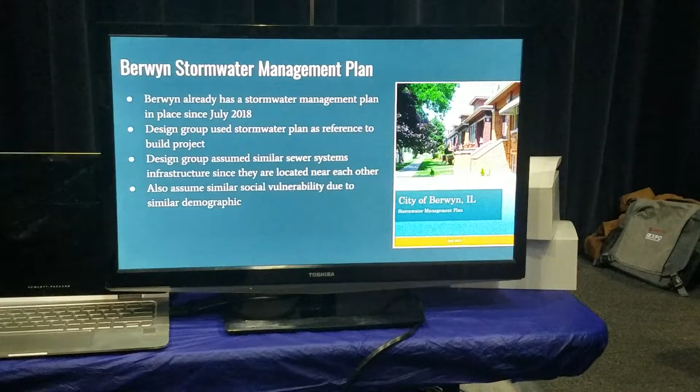From doing research on Berwyn, we found that they do have a stormwater management plan, which we used as a reference to build our project. We also found that they do have sewer data electronically and GIS data. So since the communities are so close to each other in proximity, we decided to assume that the sewer system in Berwyn is similar to that of Cicero's, as well as the social vulnerabilities. Since they both have similar demographics, we assume the same vulnerabilities related to the flooding issues.

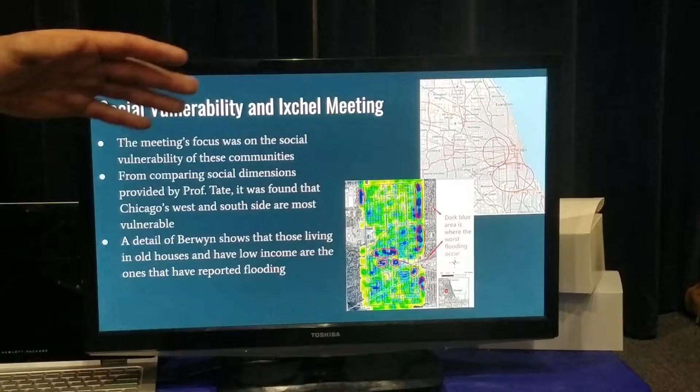An overview of the social vulnerability from Chicagoland. I used the methodology from a professor at the University of Iowa. He teaches a class of social vulnerability and geography, so I went through his lectures and followed his steps to figure out which areas are most socially vulnerable by comparing census data from 2011 to 2015. I compared the poverty rates, the age, how many dependents, homeless, and I found that Chicago's west and south side are most socially vulnerable.

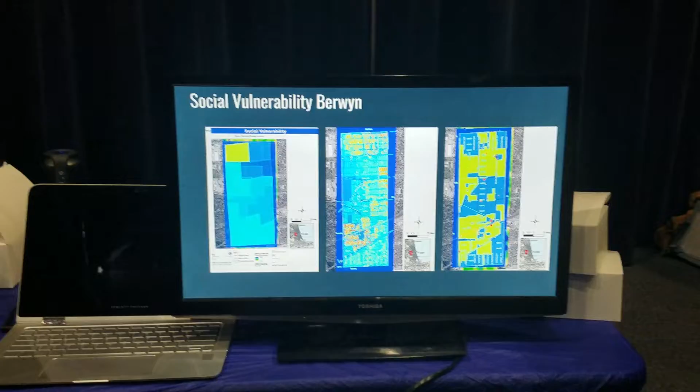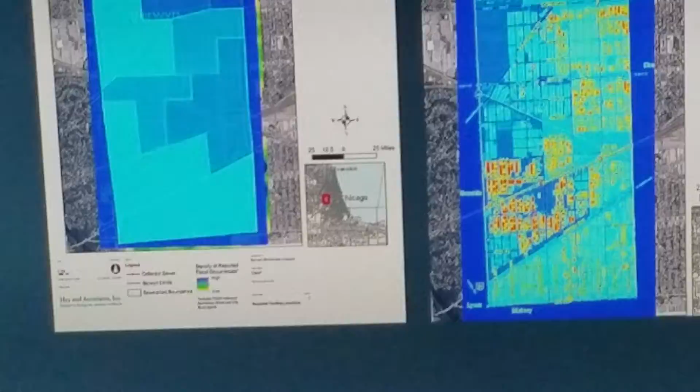And then from the information that we had with Berwyn, we decided to do a more in-depth analysis. I'll let Empire explain. So here are social vulnerability distribution maps of Berwyn, referenced from the governmental report using GIS techniques. As we can see from the first map, different colors represent the different densities of the social elements. The first one is household income, the second is house age, the third one is the potential risk of facilities. For example, the green area represents the community with the highest household income.

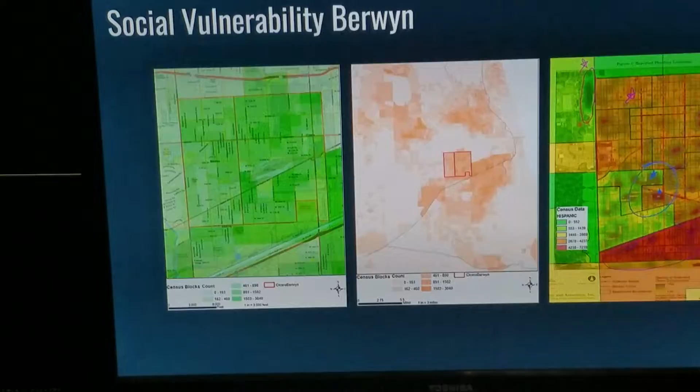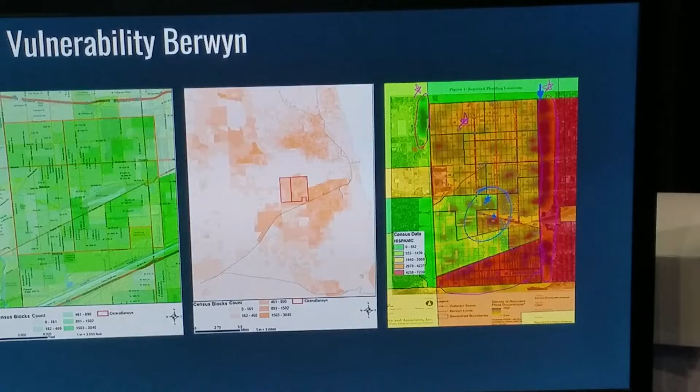So you can see the overlay and combination of the two maps. The first one on the top is the Hispanic population distribution map, and the second is the flood occurrence distribution map. As we can see from the border between Berwyn and Cicero, the red and blue areas are the communities with the most frequent occurrence of flooding, and these areas correspond with the most dense Hispanic population. So that completes this part of our project.

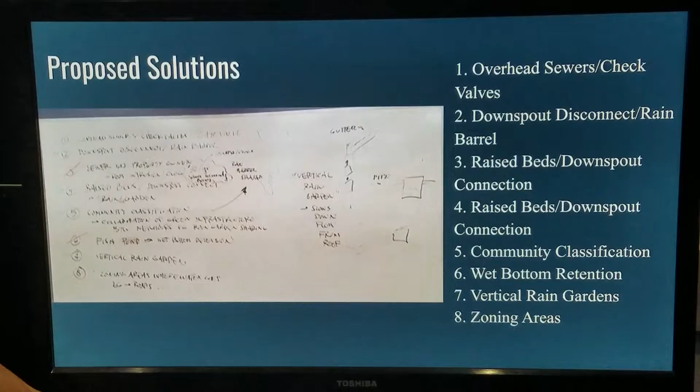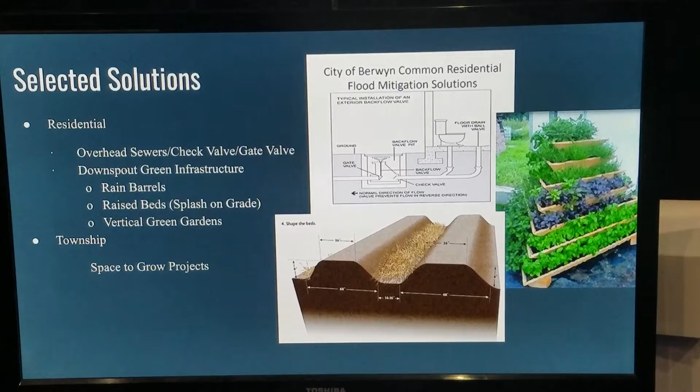So here are specific solutions to facilitate the reduction of stormwater runoff. We have 8 actual practical solutions, and these several are selected important solutions. We have residential overhead sewers, downspout infrastructures, rain barrels. So now it's my part.

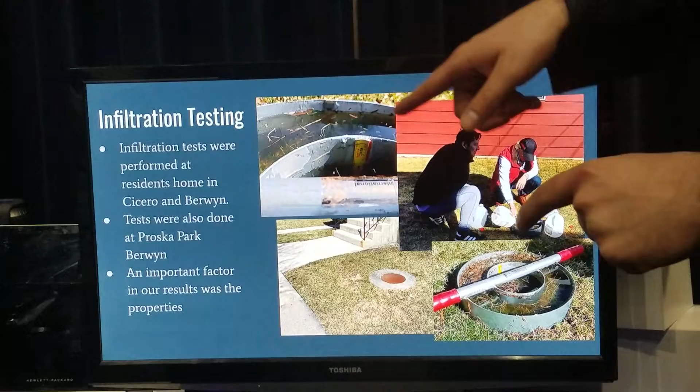To further analyze the problem of flooding in Cicero and Berwyn, we did several tests. One of the most important was the infiltration testing, which we did in six different houses. We tested the front yard and the back yard. This test involves replicating a storm event and then measuring how long it takes for the water to percolate 1.5 inches. Based on that, we'll know not only how fast it percolates, but also the characteristics of the ground, and what each household needs to have a faster percolation rate.

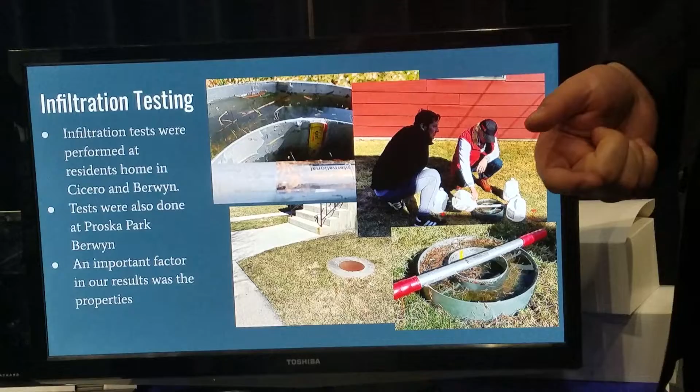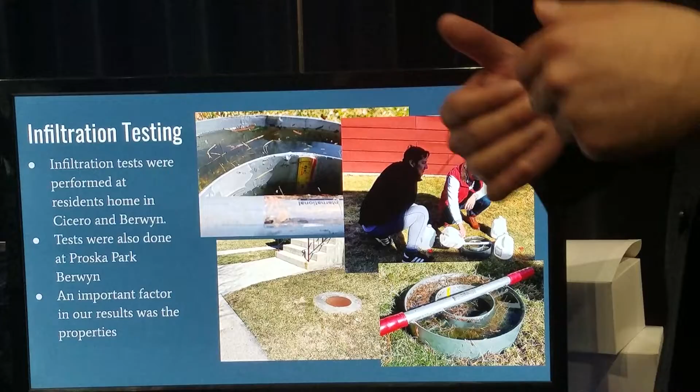One of the most important factors in Cicero and Berwyn that affected the flooding was the soil properties. It's very well known that Berwyn and Cicero are located on clay soil, and clay soil is known for not percolating water very well. Also, how compact is the soil in this area? This could greatly affect the percolation rate in each house. For the tests, all the percolation rates were different, which also determined that each household will require a different solution.

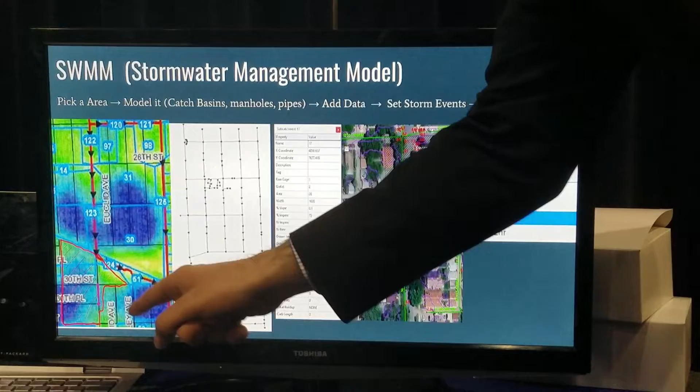Also, we developed a stormwater management model, in which we created a sample area where all our proposed solutions will be applied, and then we picked a main spot, mainly the biggest pipe on the main streets, and we plugged in all the data from this area.

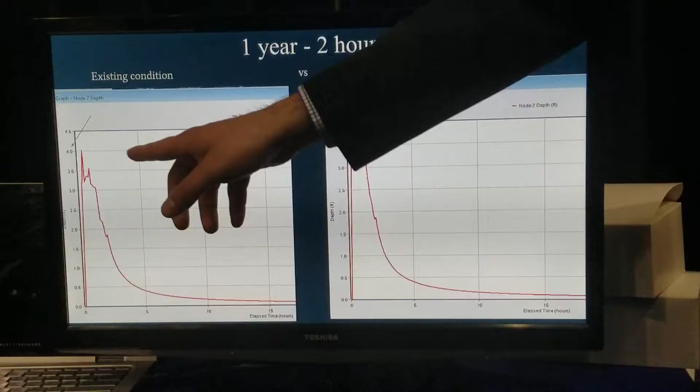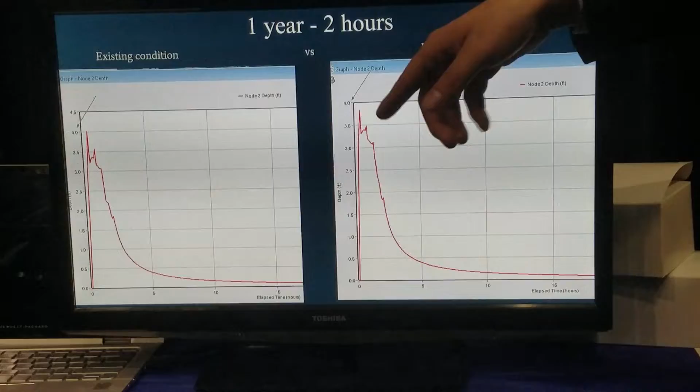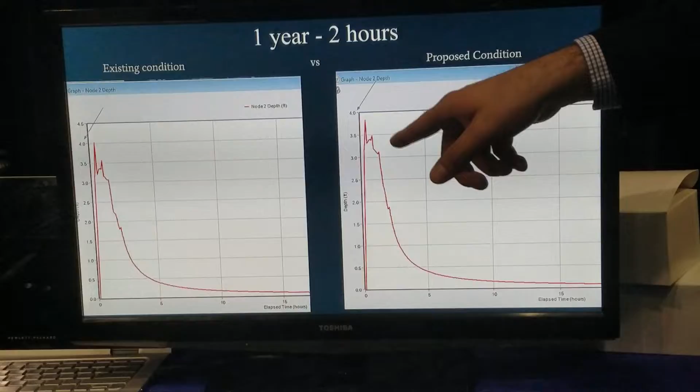We set different types of storms, and then we ran a model with it. From here, we can tell that this is the existing conditions. These are the conditions of the area without our proposed solutions. And after our proposed solutions, we can see the max depth of water reduced slightly, but also the percolation, the infiltration rate, improved. Right, there is more infiltration on the ground.

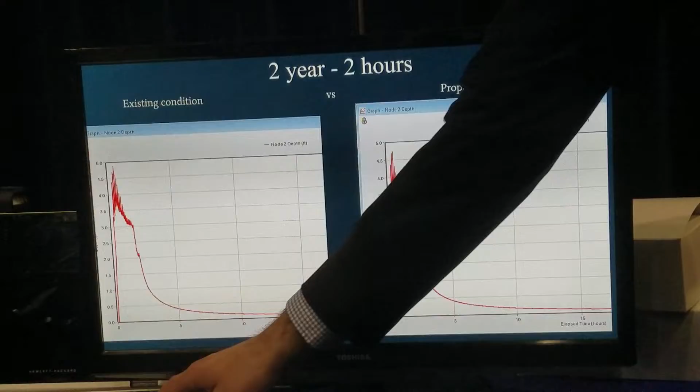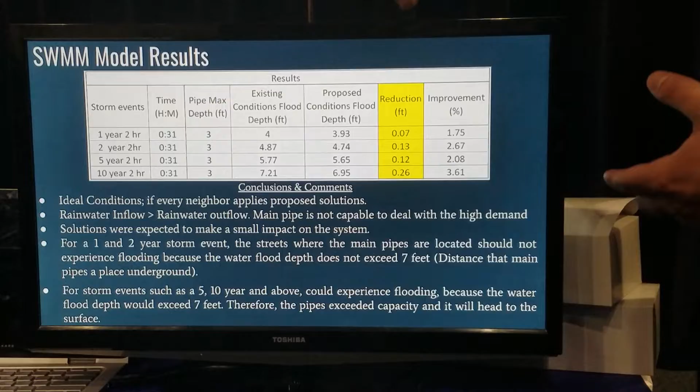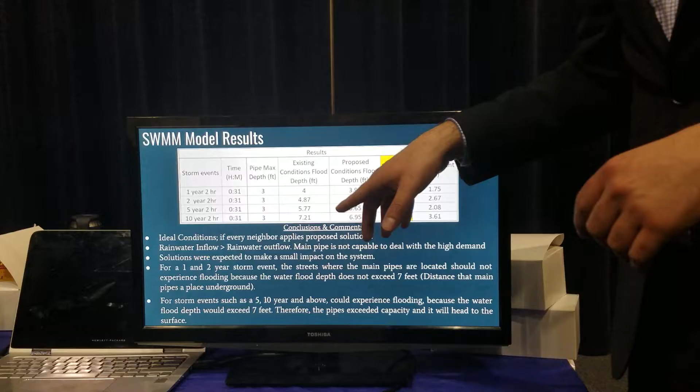This pattern continued in all the different storm events. The max depth of flooding water decreased, and there was a very small increase in the infiltration rate. But from these models, not only can we say that there was a reduction of the flood depth, but also we can determine that these solutions might not be enough, because when we did this model in the sample area, this will only work if everyone in the sample area applies these proposed solutions. Right?

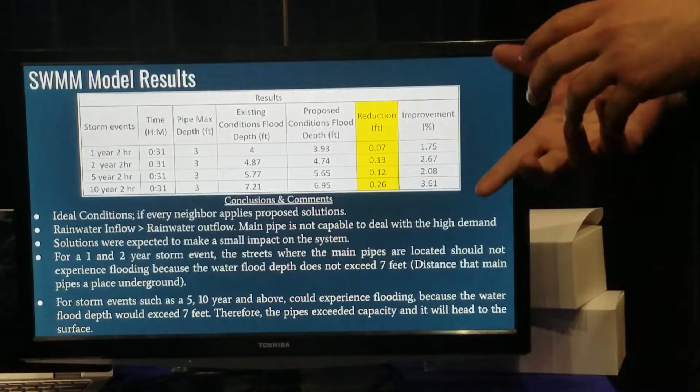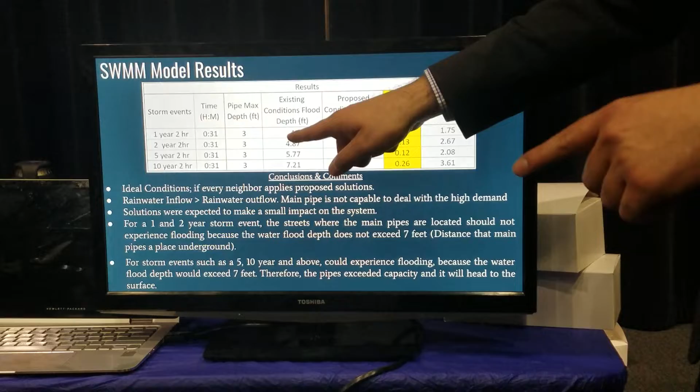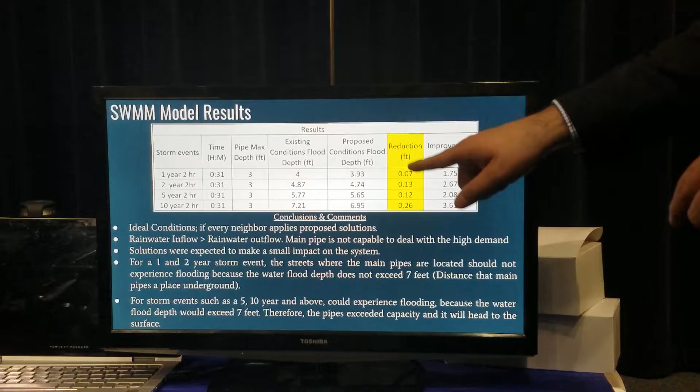So we can say that the rainwater inflow is way bigger than the rainwater outflow. Based on this, we can say that the pipe max depth is 3 feet, right? However, in just a 1 year storm, it can easily exceed the capacity of the main pipe by 1 foot. In our proposed conditions, if everyone applies it, it will only cause about a 1% improvement, right? Which we mean is not enough. And that's every neighbor. Yes.

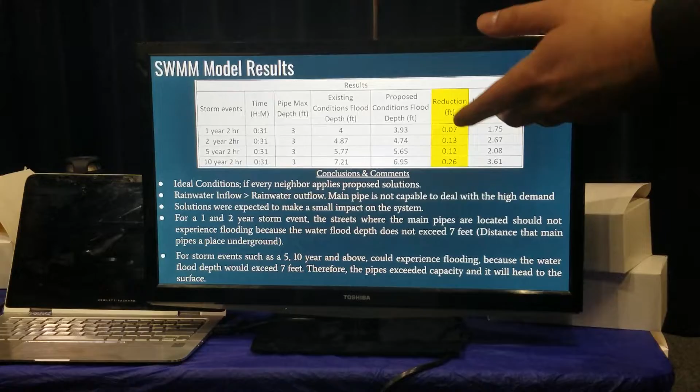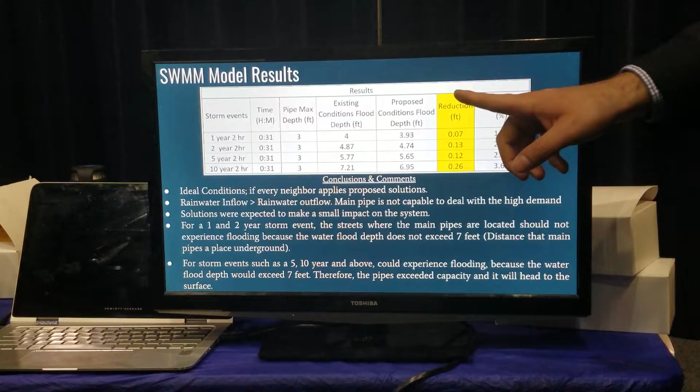So our solutions are meant to target at a micro level scale. They're meant to mitigate the property damage caused by the flooding, and sort of grab all the water and throw it into the main sewer system. But this analysis proved that the main sewer system, in general, at least this main pipe, is not able to handle just a 1 year storm.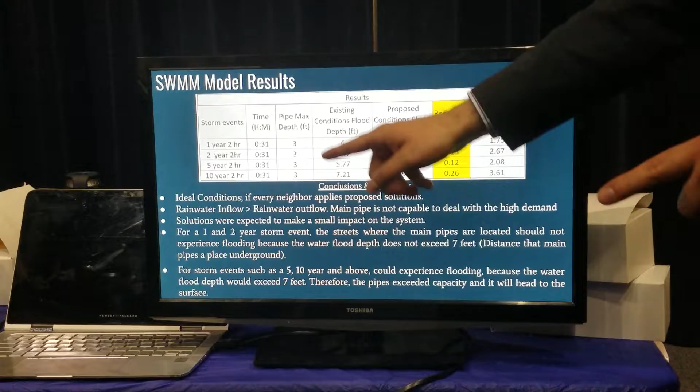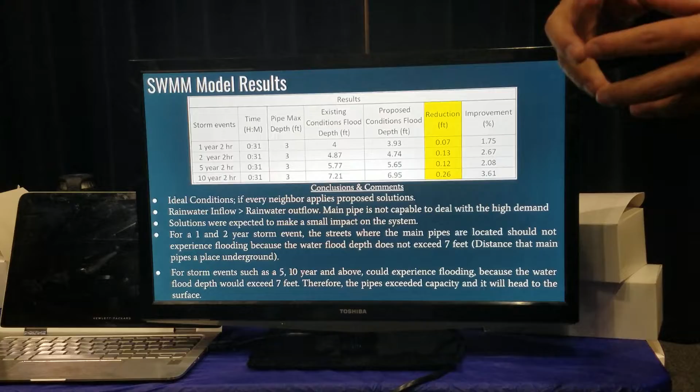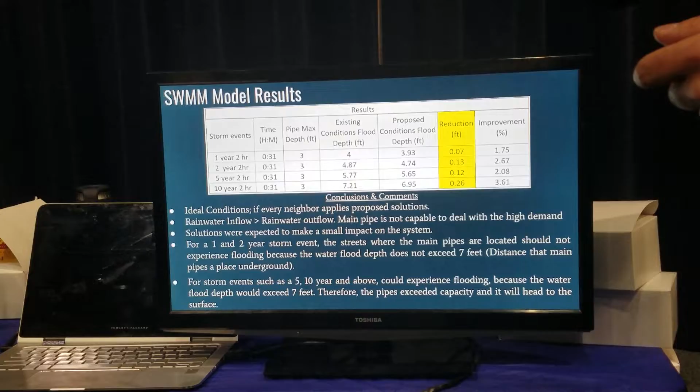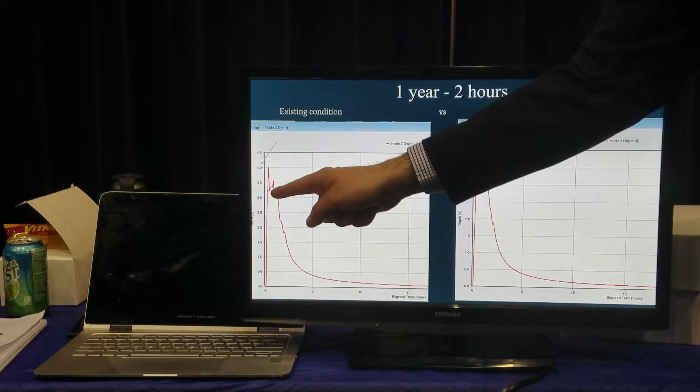However, for a 1 and 2 year storm event, we can see that the water exceeds pipe capacity. However, we might not be able to see the flooding right away because these pipes are deep in the ground. So once the pipe exceeds capacity, the water tries to go to the surface. We assume that these pipes are at least 6 to 7 feet deep, so we won't see it right away.

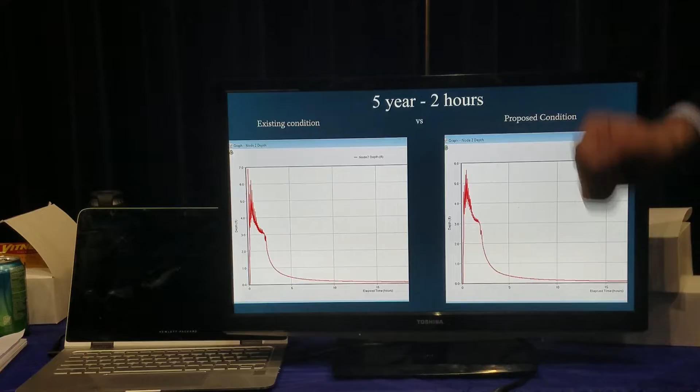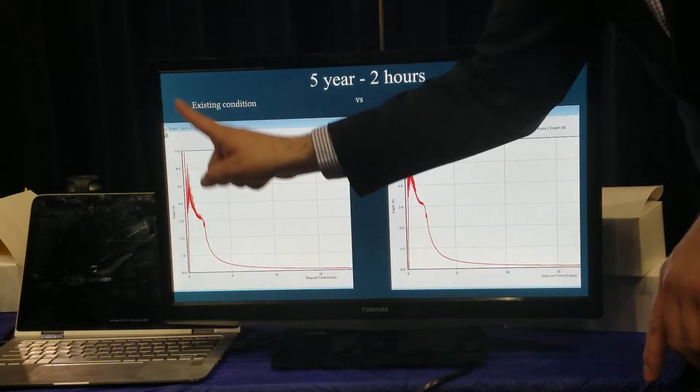However, in a 5 and 10 year storm event, we should start seeing the flooding coming out of the pipes located in the main streets, right? Because usually they're 7 feet deep in the ground. From 0 to 3, this is the max depth of the pipe. Once the pipe capacity is exceeded, the water starts going to the surface, and that's when we start seeing the flooding on the main streets, which is the pipe that has the biggest capacity.

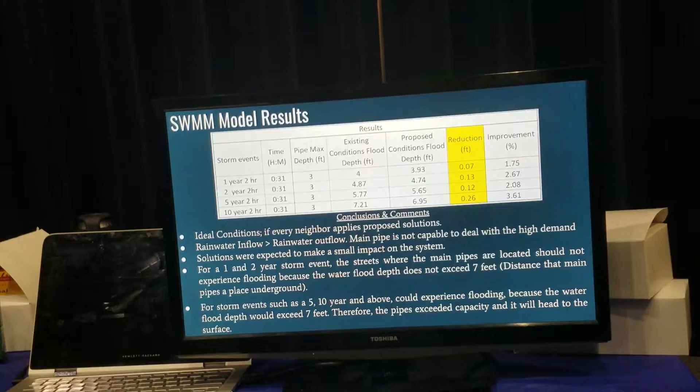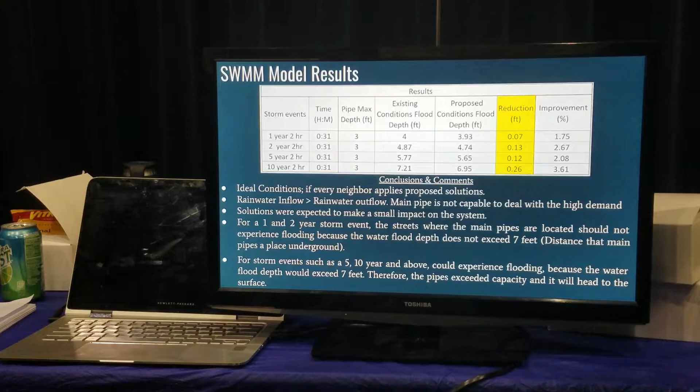So it's important to highlight that the solutions are not meant to solve the problem at a macro level, but they're meant to work at a micro level, which is to mitigate the damage in the houses, grab most of the water out of the property, and take it into the main street.

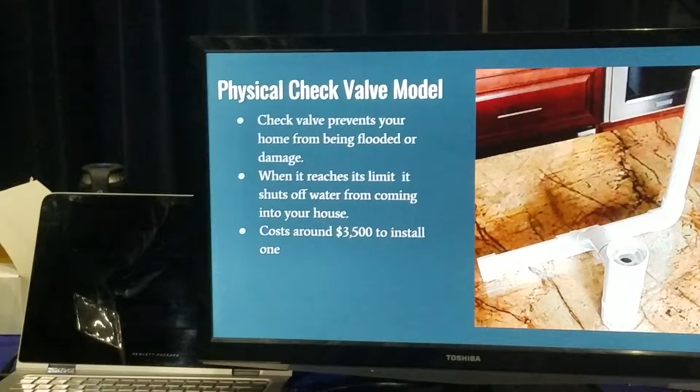So we came up with this check valve model. How the check valve works is it prevents your home, like your basement, from being flooded or damaged. There's a valve in your sewer, and if it reaches the maximum capacity, it'll shut off, so the water can't go in or out. If it shuts off, the water is not going to go back into your basement as backflow. It's going to go outside to the residential streets.

To install one, it costs about $3,500 to $5,000, depending on the company that installs it. Some cities have a 50% buyout, so the government pays 50% of it and you pay the other 50%. So it's pretty convenient.

Also, we made a little model of how a check valve works. This would be your sewer head, and when you put a ball in here and pour the water in, the ball is going to rise to the top, so it works like a check valve. And then all the water will just go to the sewers. So we just made a little demonstration of how that works.